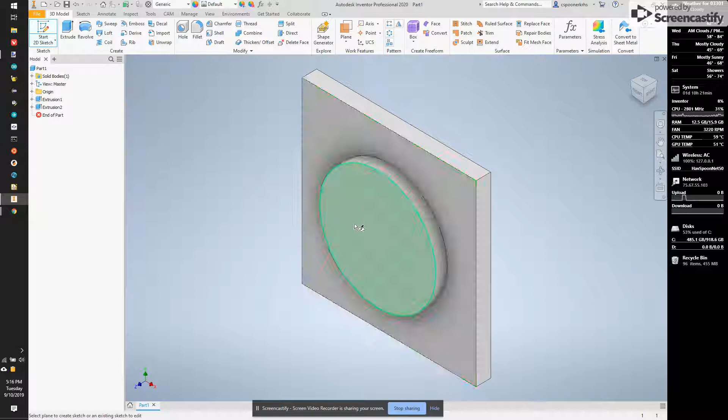They are different planes. I want my circles to kind of be like ball shaped, so they come out of the circle. Instead of being just cylinders, they're going to be like hemispheres.

So I'm going to start off by drawing a line, just somewhere over here. I'm going to hit escape. Now I have my line.

I'm going to use the arc tool, and I personally like the 3-point arc tool. I'll select the top of the line, the bottom of the line, and then pull out to make a D shape or backwards D. It doesn't matter which way I go.

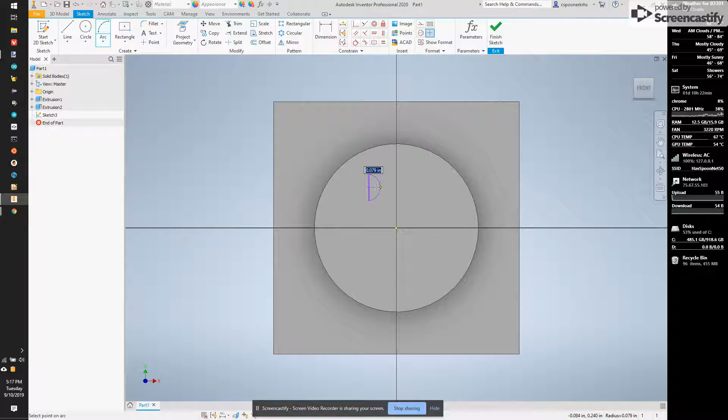Now, this D, I'm going to zoom in on it. I want to make sure that this center point is exactly on this line, and we can use the coincident constraint to do that. Coincident puts a point on a line. So I'll click coincident, and put this point onto this line, and now it's exactly half a circle.

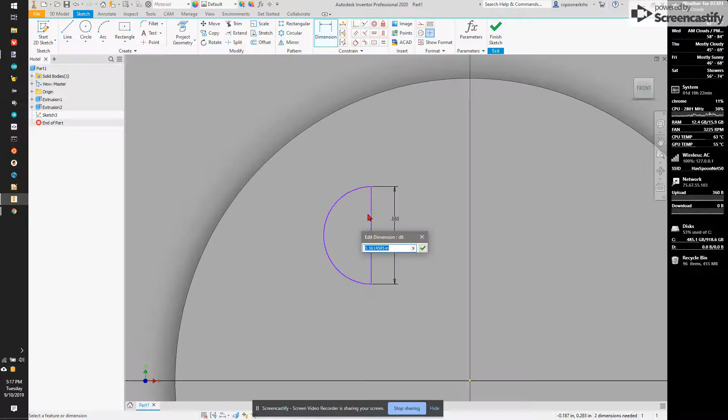Now I need to dimension it. The first thing I can do is, I know this eye should be, if I go back to my drawing, about half a square or so, so 0.125. And this is about a little bit, about quarter-inch from the center.

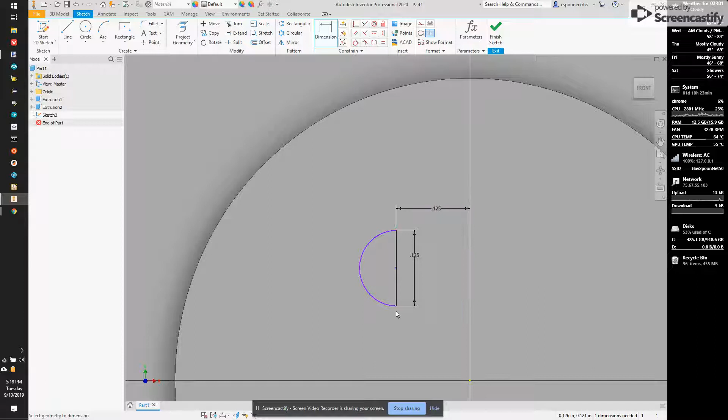So from here to here, dimension, I'm going to click on the line, then click on the origin, and move my mouse straight up, and do 0.125. And I want this to be from here to here, click on the origin again, but coming up this way this time, I'm going to do 0.05.

Maybe a little higher than that, so how about 0.1. If I don't like this, I'll come back and change this later, but that's a good starting point.

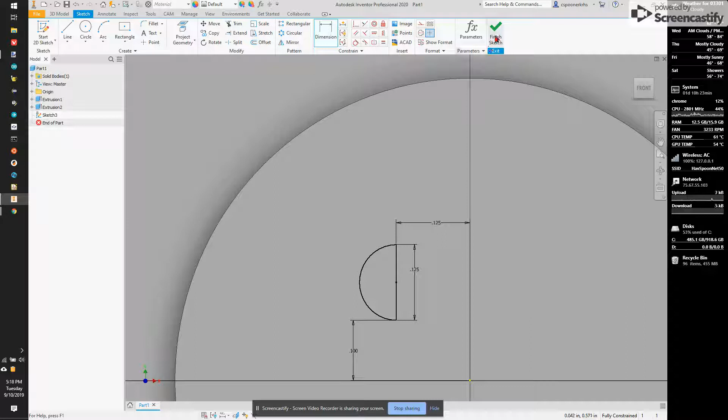So I'm going to hit Finish Sketch, and now I'm going to revolve this shape. I'll make sure it selects that, and I also need to select an axis to rotate about. So I'm going to revolve about this center line, and it's going to make a bug eye.

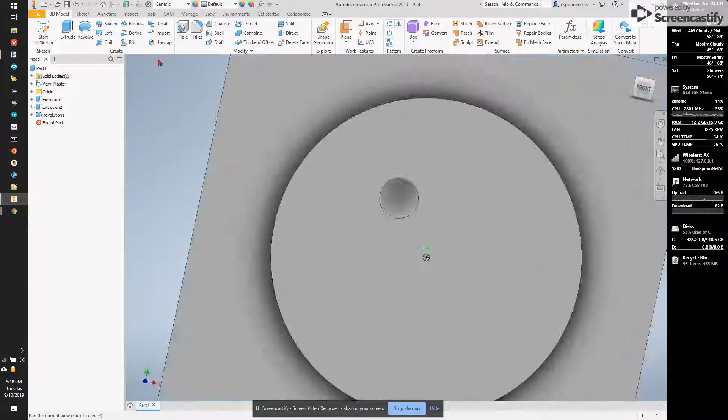If I want to make it sunken, I can cut instead, and hit OK. I now have a dished out eye, and it looks kind of neat. I only have one eye right now, we'll take care of that in the next video.